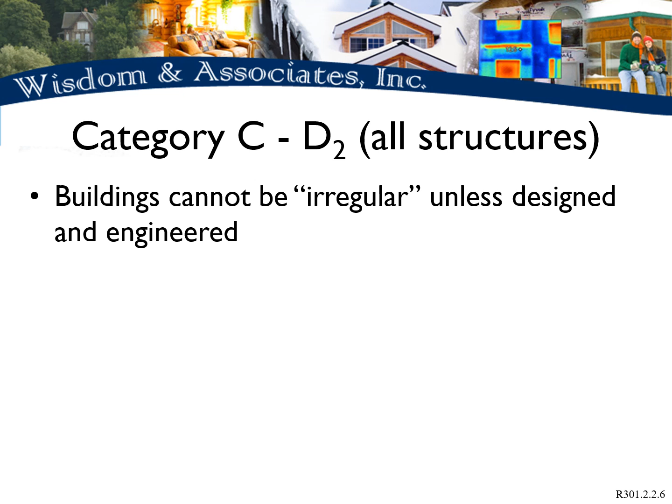A new condition has been added to the 2021 edition of the code, which now includes hillside light frame construction. This type of construction most commonly refers to daylight basements, but would also apply to crawl spaces on sloped lots. In order to be considered irregular, all of the following factors would apply: 1. The grade slope exceeds 1 in 5 on any side of the building. 2. The tallest cripple wall exceeds 7 feet.

In this instance, a cripple wall would be any wood-framed wall between the lowest floor and the floor above, generally resting on top of the foundation. Cripple walls are common where full-height foundation walls are not used on sloped sides of lots in order to save on materials. And number 3, less than 50% of the interior walls in the structure are finished.

As we can see, these rules are really targeting the unfinished daylight basement, due to the imbalanced load on the foundation and the lack of shear strength from the unfinished walls. There is an exception to this rule, which does permit the downhill or daylight side to be fully stick-framed if all other walls are full-height foundation wall from the slab to the floor above.

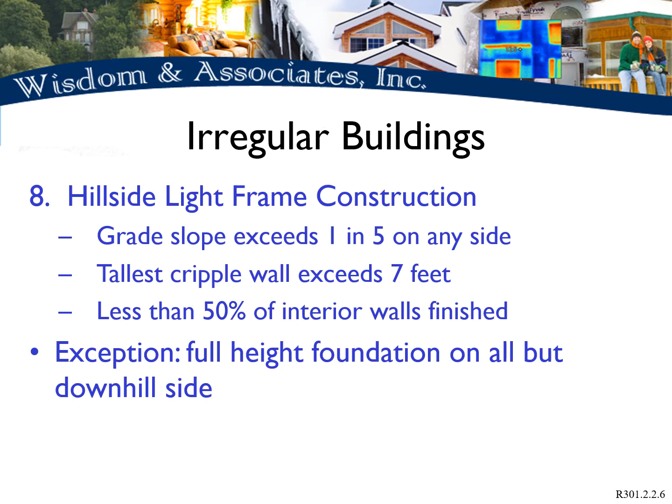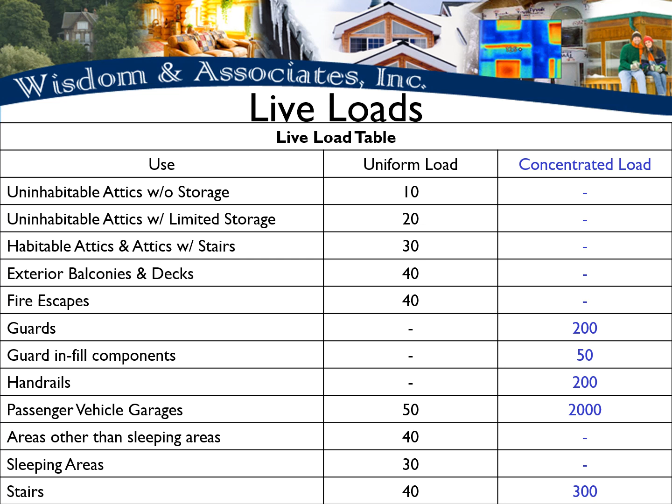A change to the live load table has occurred in the 2021 version of the code, where live load was changed to uniform live load, and a category for concentrated load was added. Interestingly, some of the concentrated load in the updated table comes from the notes in the 2018 version, but these notes, plus some new additions, have been added to the concentrated load category.

There are a few interesting notes on this table to cover. One is that for passenger vehicle garages, the concentrated load applies to garages with elevated floors. A garage floor can be framed up off of grade level, but it would need a non-combustible surface, as we will see later.

The 2,000-pound figure applies to a 4.5 by 4.5 square inch area, such as would be under a vehicle tire. This figure was in the notes in the previous code edition table, but it only specified the load be applied to a 20 square inch area.

Stairways got a new similar requirement in the 2021 code with a concentrated load rating of 300 pounds on a 2-inch by 2-inch surface area, rather than 4 square inches as noted in the previous code. There must have been some pretty creative ways these loads were being tested in order for this code to change.

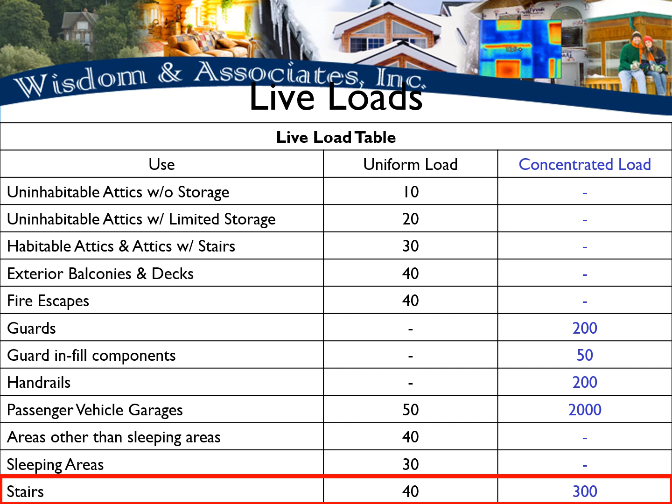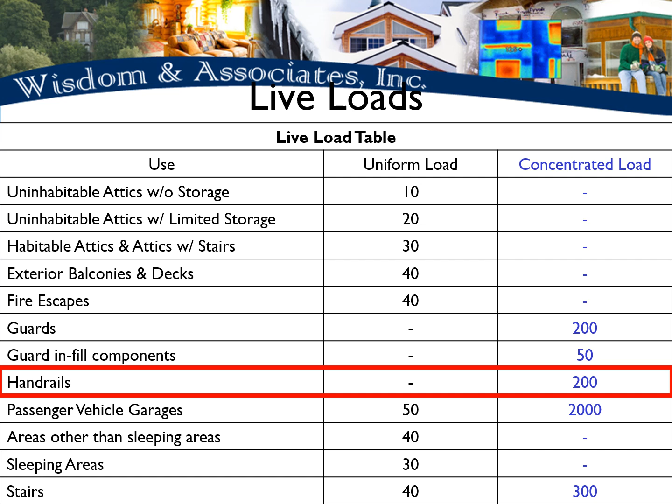Handrails also got a concentrated load rating, although this rating already existed in the notes of the table in the 2018 version of the code. Handrails must withstand 200 pounds of force applied anywhere along, and in any direction on, the top.

For dwellings with attached private garages, the garage cannot open directly into a room used for sleeping purposes. Although bedrooms are not strictly defined in the code, sleeping rooms must have an emergency egress window meeting all requirements of this code, as well as a smoke alarm. So rooms that meet these requirements cannot open directly into a private garage.

Doors that separate the interior of a residence from an attached garage must meet special requirements for fire separation and protection. The door must either be a minimum 1 3/8 inch thick solid core wood or honeycomb steel door, or have a minimum 20-minute fire rating approval.

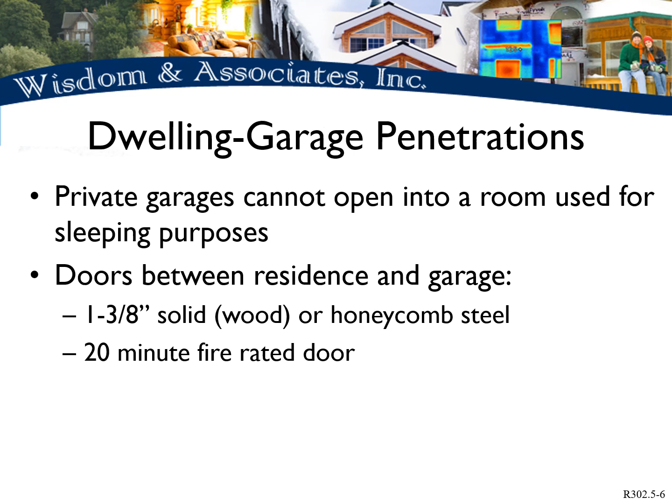Windows are not permitted in these doors unless they are a tested assembly and UL listed. A self-latching and automatic closing device is required on the door between the garage and the home.

This is a significant change in language from the previous code, which did not make any reference to the door being set to latch.

For a garage man door to effectively block smoke, fire, and carbon monoxide from entering the living space, latching is crucial—just as important as the door's ability to self-close. Without a reliable latching mechanism, even a closed door becomes susceptible to air pressure caused by a fire, potentially forcing it open. Notably, the code does not spell out how the self-latching is tested, such as how far the door must be opened to accomplish it.

Moving on from fire protection, let's take a look at minimum habitability requirements. Each habitable room in a dwelling must have at least 8% of the floor area in windows, and 4% of the floor area must be operable window.

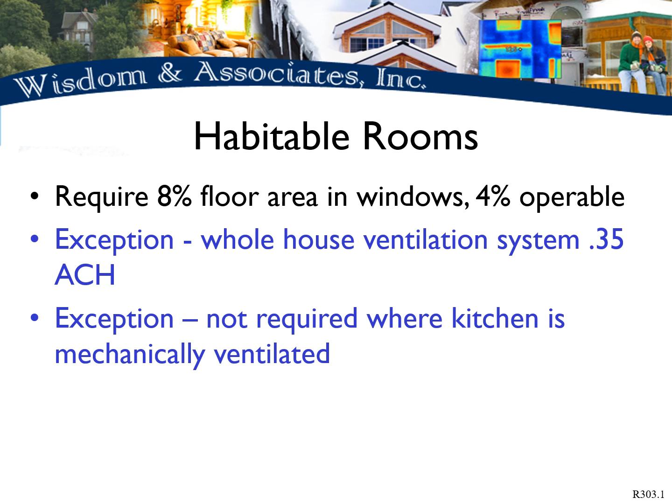Operable windows that meet egress requirements are still needed in bedrooms and sleeping rooms. Operable windows can be omitted from kitchens where local exhaust is provided at a rate of 100 cubic feet per minute, which is also a requirement of the state-adopted energy and ventilation codes.

Air intake openings, such as for ventilation systems, whether passive or mechanical, must be located at least 10 feet from any contaminant sources, such as chimneys, vents, or parking areas. An air intake can be closer than 10 feet if it is 3 feet below the pollutant source.

This is a slight departure from the state-adopted energy and ventilation code, which does not have the 3-foot exception, so keep that in mind. The exhaust from dwelling unit toilet rooms, bathrooms, and kitchens is not considered hazardous, so there are no separation requirements for these exhausts from air intakes.

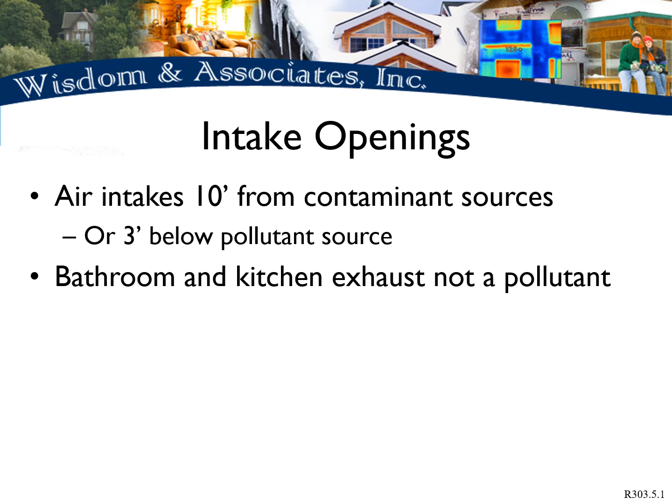Dryer ducts, however, are in their own category and must terminate at least 3 feet from openings into the building, which the code has clarified in 2021 to include soffit vents. The amount of moisture produced by clothes dryers can be very damaging to the building, especially in the attic space, so dryer exhaust must be kept well away.

The exhaust from clothes dryers is typically much warmer than the surrounding air and as such wants to rise into openings in the building above, such as soffit vents. The warm, moist air in the exhaust will condense on the cooler building components, especially during the winter, which can lead to a buildup of frost and moisture that will damage the home over the long term.

A new ceiling height exception has been added to the 2021 code for non-basement areas. Beams and girders, which are spaced at least 36 inches on center clear finished width, meaning 36 inches between the edges of each beam or girder, can project down to 6 feet 6 inches.

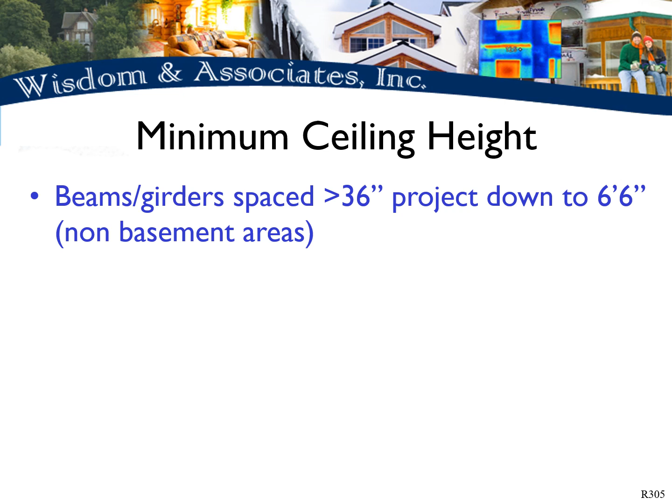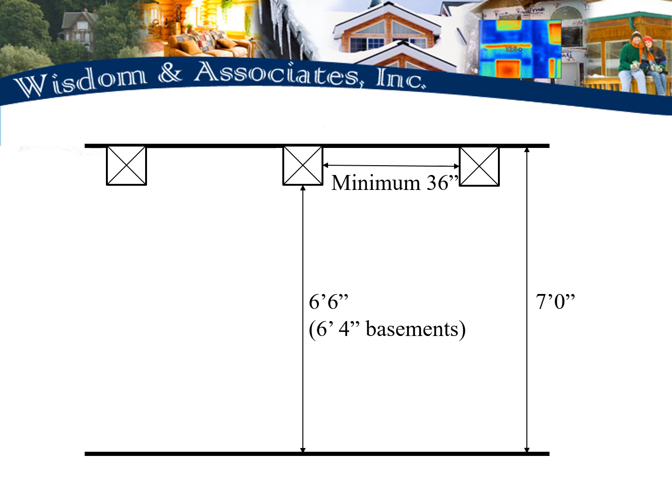A slight change to the safety glass codes has happened in the wet surfaces section. Safety glass is required at windows or glazings enclosing wet areas such as tubs, showers, hot tubs, saunas, and similar fixtures and equipment. If the enclosing window is less than 60 inches vertically from the standing or walking surface, then tempered or safety glass is required.

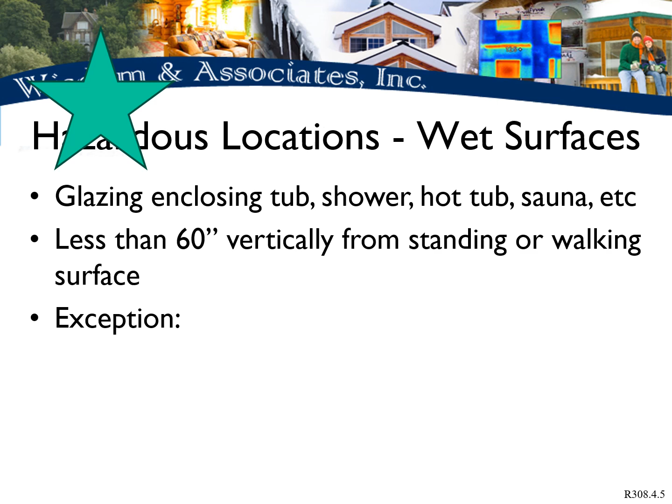The only exception is if the window or glazing is more than 60 inches from the water edge of the bathtub, hot tub, whirlpool, or similar fixture.

A slight change occurred here in the 2021 code, which removed the phrase "and in a straight line" from this section of the code. According to the commentary, this change is intended to clarify the 60-inch measurement from the water's edge to include windows adjacent to the water on any wall, not just those walls facing the wet area.

The code assumes a person is just as likely to slip and fall to the side as to fall forward into the glass, and therefore the wet area around the tub or other fixture is treated just like the bottom of a stairway.

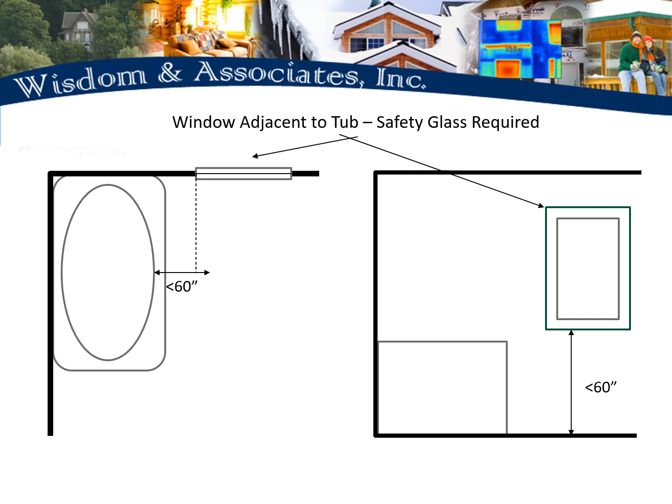This illustration shows the safety glass next to a tub or shower rule applies even to windows not on the same plane or facing the fixture. Any glazing within a 60-inch arc of the water's edge is included in the safety glass requirements if it is less than 60 inches above the standing or walking surface.

Emergency escape must open into a public way, or a court or yard that opens to a public way that is 36 inches in width. The 36 inches in width is a new addition and clarification to the code, which did not previously specify a width. This change brings the IRC in line with the IBC, which does specify a minimum width for egress courts from Group R3 occupancies of not less than 36 inches.

There is also an exception for emergency escape from basements, provided that the basement is less than 200 square feet and houses only mechanical equipment.

For proper emergency escape and rescue, the egress, whether it is a door or a window, must be operable from inside the room in which egress is required. The means of egress, again whether a door or a window, must be operable without keys, tools, or special knowledge. This means that deadbolts or similar locks or apparatus cannot be keyed on the inside.

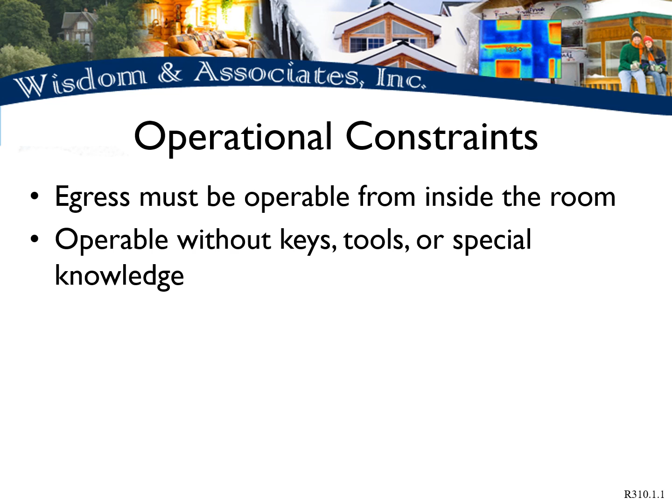If the egress is greater than 6 feet above the adjacent ground level, a fall prevention device meeting ASTM F2090 must be installed. The fall prevention device cannot be more than 70 inches above floor level. This is a new addition to the 2021 code.

This revision makes the operational and opening control device provisions in the IRC consistent with the same provisions in the IBC.

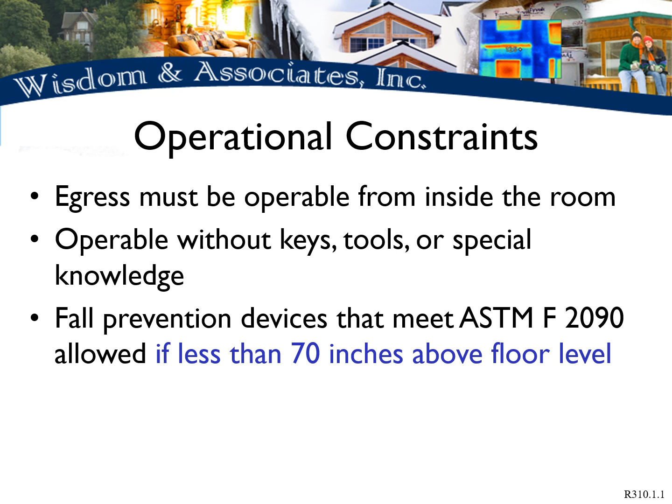A new addition to the code clarifies that the net clear opening by which the egress dimension is measured has to be from the normal operation of the window. The removal of stops installed in the frame, such as for hung windows that slide vertically, cannot be counted toward the net clear opening, since that would not be part of the normal operation.

Another significant wording change in the 2021 code is that the height of the egress opening is measured from the floor to the bottom of the clear opening of the window, not the window sill. This is a change that has gone back and forth several times in previous code cycles. Measuring to the bottom of the clear opening may take more planning on the builder's part, as the thickness of the window frame now plays an important part in the measurement of the egress opening height.

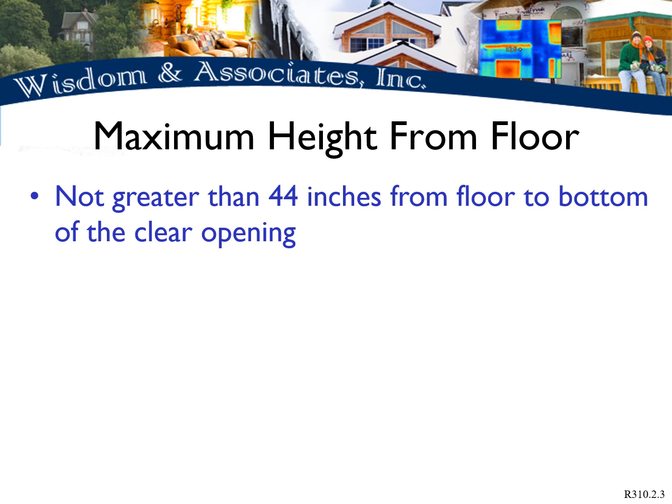Instead of a ladder, a window area well is permitted to have steps leading out of the well if the depth of the well is greater than 44 inches from the bottom to grade level. This was the case in the 2018 code as well, but some new requirements were added for step dimensions in this version. Previously, the code only said that steps did not have to comply with the rise and run requirements cited elsewhere in the egress section. The minimum width of the inside of the treads is 12 inches, and the minimum tread depth is 5 inches. The maximum riser height is 18 inches.

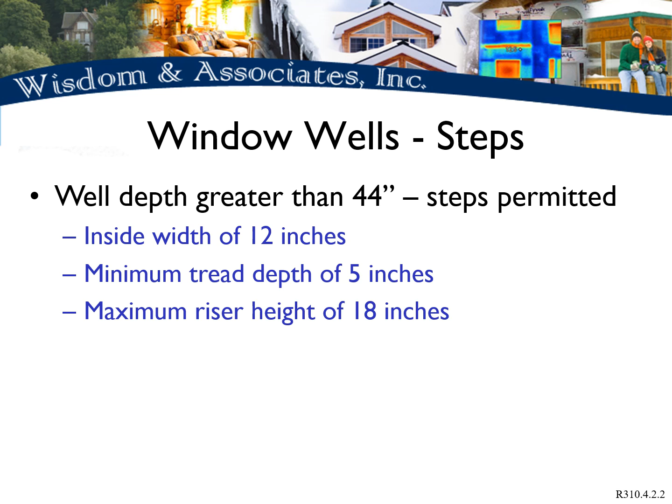Any addition to an existing structure with a sleeping room must have an egress window opening. Also, any new basement must have an egress installed, unless there is a sleeping room in the basement with an egress window, or there is an attached existing basement that already contains an egress, in which case a new egress opening would not be required. Remodeling of an existing basement does not retroactively trigger the installation of an emergency escape opening as is required for new basements.

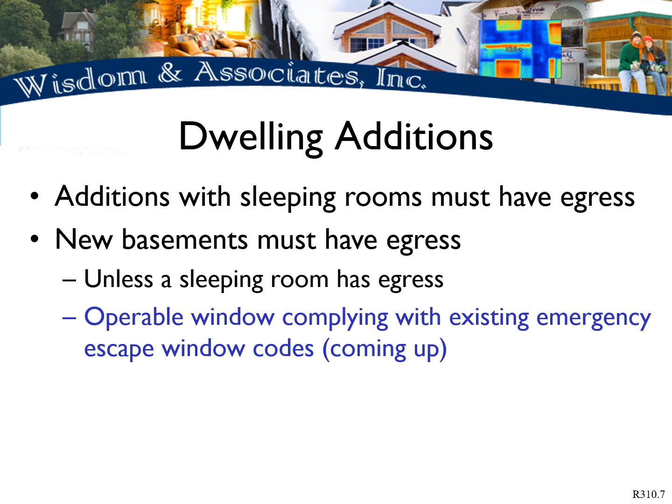A new change to the 2021 code permits an operable window of a smaller size to be used in this situation, provided that it follows certain rules. Where a change in occupancy in a basement takes place, such as when an existing or unfinished basement is remodeled to include a bedroom, a smaller than standard egress window is permitted. The smaller window is also permitted when a basement addition is installed to pre-existing construction.

The smaller egress window must have a net clear area of 4 square feet, which is substantially smaller than the 5 square feet for grade floor openings and 5.7 square feet for standard egress openings. The minimum opening height of the window must be 22 inches, rather than the 24 inches noted earlier in the egress section. The minimum opening width requirement is 20 inches, which is the same as before.

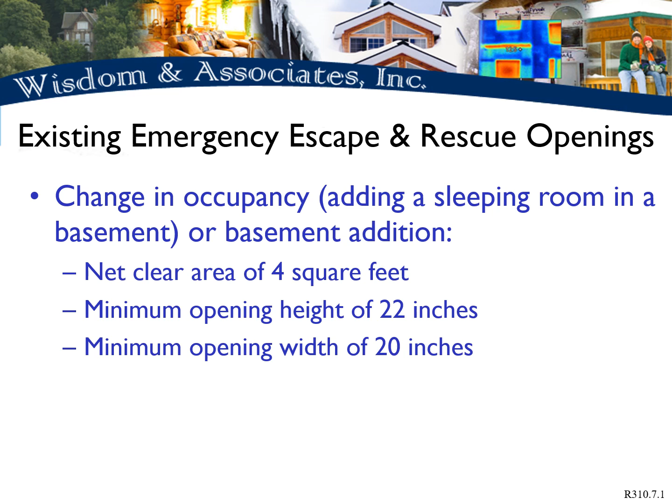An interesting addition and clarification has been added to the 2021 code, a new section describing which stairways are not required to meet code. The first of these new exceptions is for stairways that are not within the home or attached to the home in any way, including decks and porches. This exception refers to landscaping or other exterior stairways that may lead up to the building or transition between levels of the home outside of the building.

The second new exception is for stairways leading to non-habitable attic spaces, such as drop-down folding type stairs, which are often used to access attics that are floored for storage but do not contain habitable space. The third new exception is for crawl spaces, which are now explicitly permitted to be accessed by a ladder or other means. This is a common sense addition to the code that most were already following anyway, but now it has been made clear.

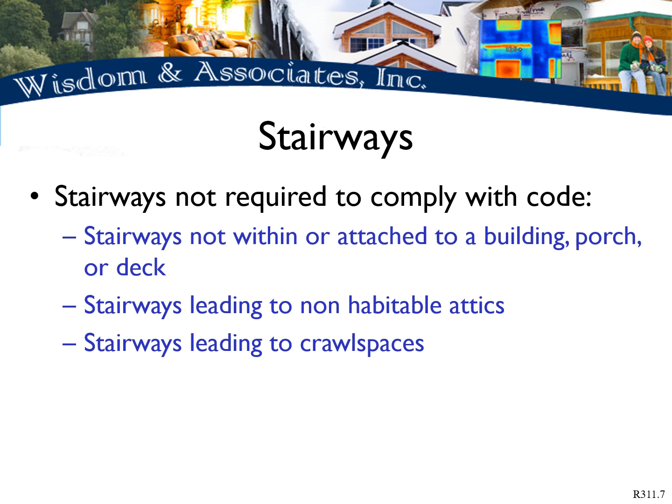The walking surfaces of stair treads and landing surfaces cannot exceed 1 in 48, or 2% slope, in any direction. A new addition to the code allows steeper slopes, up to 5% or 1 in 20, for exterior landings that also drain water away from the building. Impervious surfaces around the perimeter of the building must be sloped away, and this code permits a greater slope to allow that to happen.

This new exception addresses the potential conflict between the minimum drainage slope and the maximum slope allowed for an exterior landing. To comply with surface water drainage codes, an exterior landing can now slope up to the minimum 5% required for finished grade around the structure.

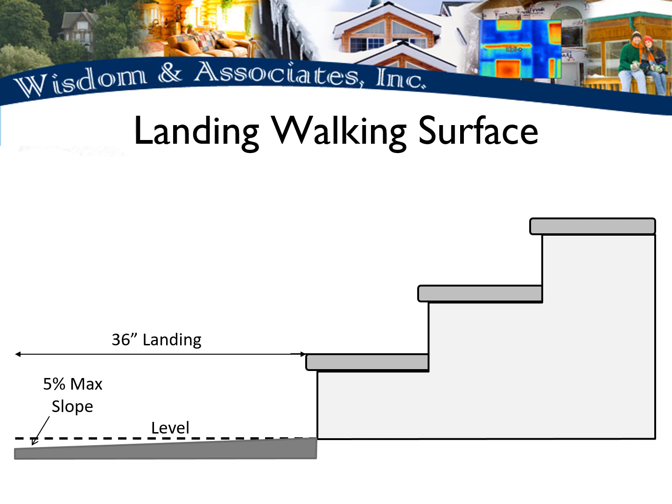Handrails must be continuous from a point over the lowest riser to over the top riser. This means you must be able to place your hand at one end of the railing and not have to lift or remove your hand until reaching the other end.

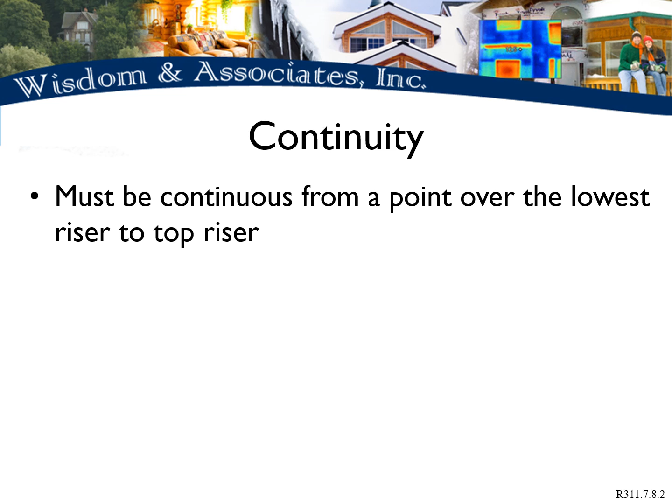Handrails must either return to the wall or properly terminate into a guard or post. The language of safety terminals cited in previous editions of the code has been removed since it was not clearly defined what a safety terminal was. We suggest checking with your local building department to get their interpretation of what is acceptable for a hand railing termination in your jurisdiction. Hand railings must have a minimum 1.5-inch clearance between the railing and the wall to allow for proper grip.

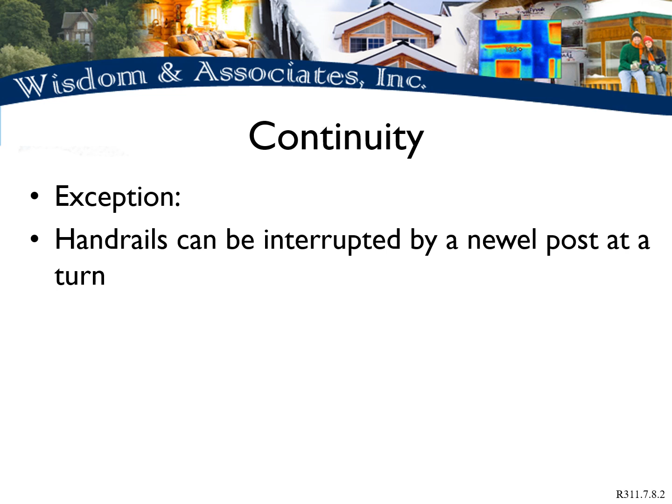There are two exceptions to the continuous handrail requirement. The first is that handrails can be interrupted by a newel post at the turn in the stairs. The second exception is that a volute, turnout, or starting easing is allowed over the lowest tread. An addition to the code now permits a volute, turnout, or starting easing at the top landing as well as the lowest tread.

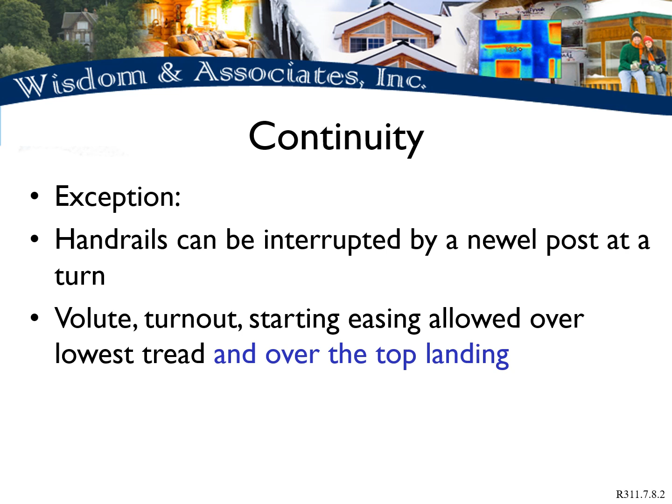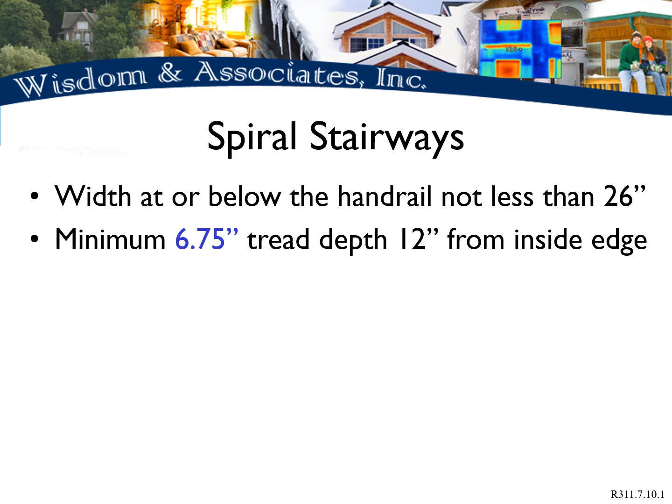Spiral stairways have a different set of requirements than regular or winder stairways. The width of a spiral stairway must not be less than 26 inches at or below the hand railing. The minimum tread depth for a spiral stairway is 6 3/4 inches at a point 12 inches from the inside of the tread. This is a reduction from the previous edition of the code, which required a minimum 7.5 inches along the 12-inch walk line. Spiral stairs are allowed up to a maximum of 9.5 inches of rise, and the minimum headroom for a spiral stair is 6 feet 6 inches.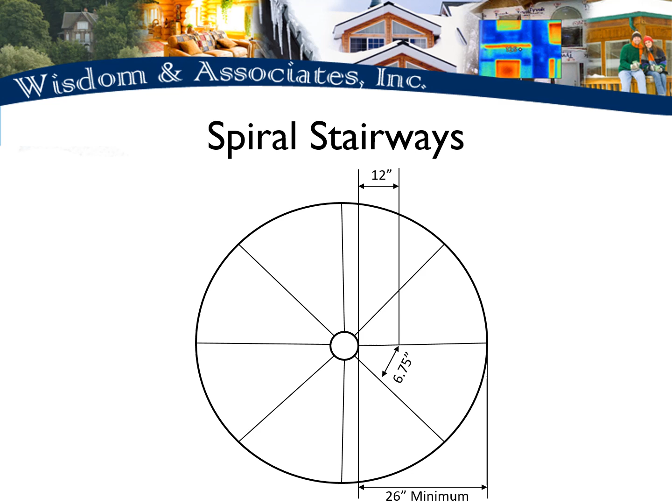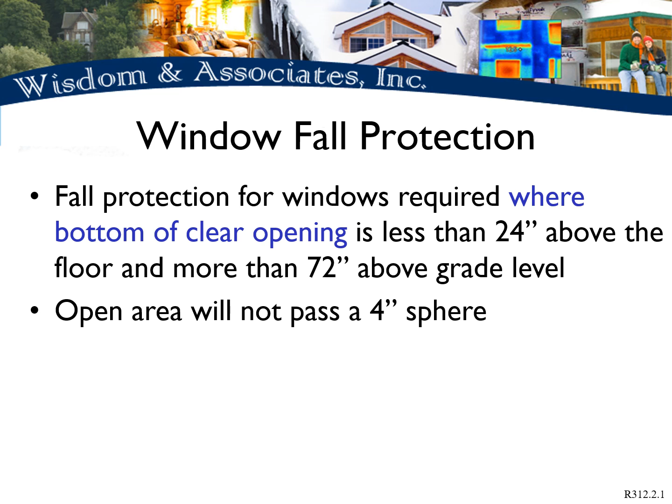Window fall protection is required for windows where the bottom of the window clear opening is less than 24 inches from the finished floor and more than 72 inches above grade level. There is a wording change here that used to read top of the window sill and now reads bottom of the window clear opening, which is consistent with the change made in the egress window section of the code. The idea is to protect small children from opening and falling out of a window onto the ground. Similar to the guarding requirements noted elsewhere, the opening area must not allow the passage of a 4-inch sphere with the fall protection installed.

Smoke alarms are an important life safety device that can alert the occupants to a fire in the dwelling. Smoke alarms are required in each sleeping area of the dwelling, and also required outside each separate sleeping area in the immediate vicinity of the sleeping area. A smoke alarm is required on each story of the home, regardless of the presence of sleeping areas. Smoke alarms are not required on split-level homes with a floor level difference of less than one story, provided that there is not an intervening door between the levels.

A new addition to the code permits listed smoke alarms that are marked as helping reduce cooking nuisance alarms. These cannot be installed closer than 6 feet to permanently installed cooking appliances. These alarms are a UL listed type that have become recently available.

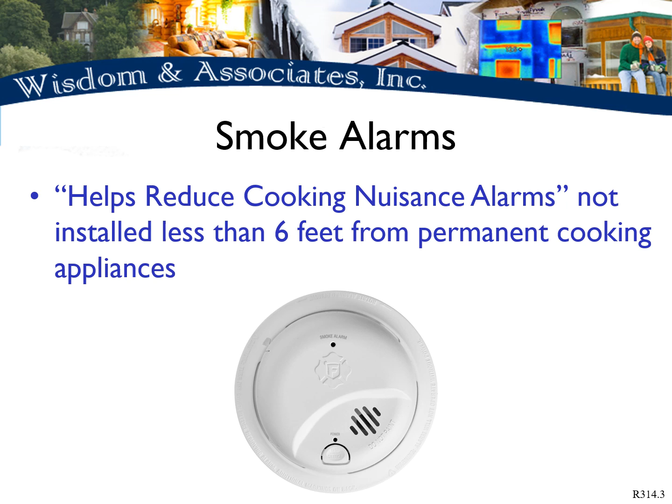Due to the risk of carbon monoxide poisoning fatalities typically happening while people are asleep, the IRC mandates the installation of carbon monoxide alarms near and around bedroom areas. This requirement is in line with that for smoke alarms and applies not just to new homes, but also to existing homes undergoing construction work, making it one of the rare retroactive rules in the code. If construction work necessitates a permit, then the installation of alarms in specified areas becomes mandatory.

Carbon monoxide alarms are required in all dwellings that have either a fuel-fired appliance or an attached garage. They must be installed outside of each separate sleeping area of the home in the immediate vicinity of the bedrooms. Carbon monoxide alarms must also be installed in every bedroom or sleeping room where a fuel-fired appliance is located in the bedroom or in an adjoining bathroom. This could include a water heater, space heater, or a gas or wood-fired fireplace or stove. Where more than one carbon monoxide alarm is present, it must be interconnected with any other carbon monoxide alarms installed.

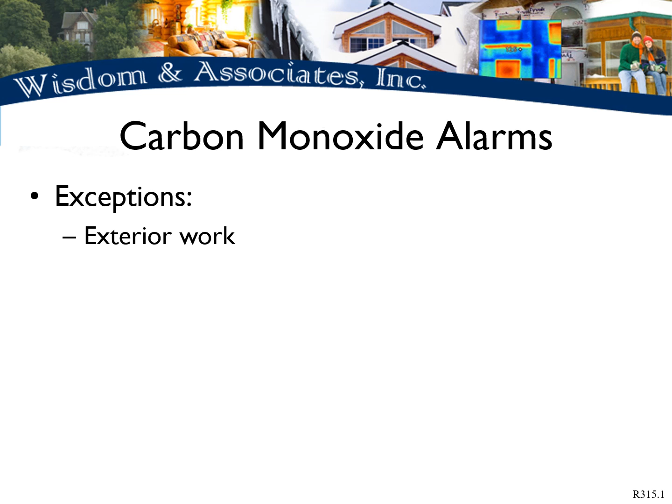There are a few exceptions to the carbon monoxide alarm requirements for retrofit or repair work on homes. The first exception is for when the work being done to the home is on the exterior only, such as for the replacement of doors, windows, roofing, or siding.

The second exception is for the alteration, installation, or repair of existing plumbing work in the home. This type of work would not trigger the requirements of installing carbon monoxide alarms.

The third exception is for the alteration, installation, or repair of mechanical systems that are not fuel-fired. This is a change in the wording of the code from the previous edition that exempted all mechanical work. Now, however, if work is to be done with a fuel-fired appliance of any type, carbon monoxide detectors must be installed.

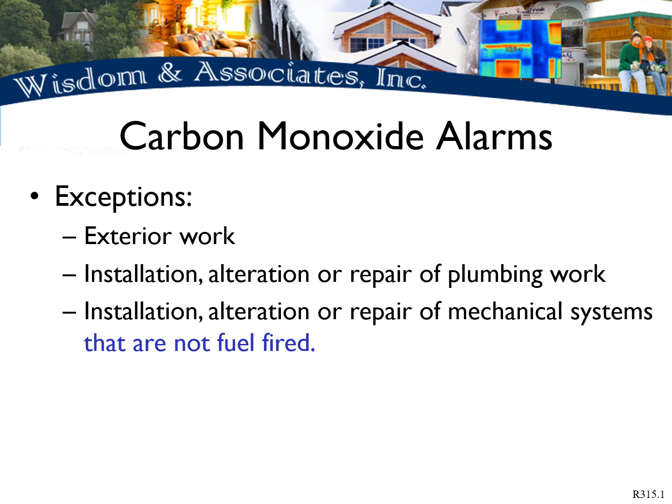Foam plastic insulation is a lightweight synthetic material used as an insulation to enhance the energy efficiency of buildings. It comes in various forms, including spray foam, rigid foam boards, and flexible foam sheets, catering to different applications from walls to roofs and floors.

This type of insulation has good thermal resistance and high R value per inch in many cases, but may also be considered a potential fire hazard when installed inside the building.

Foam plastic products located in the attic do not have to be covered by gypsum board or 23/32 inch wood structural panel as long as the space is accessible and the space is entered for maintenance or repair only.

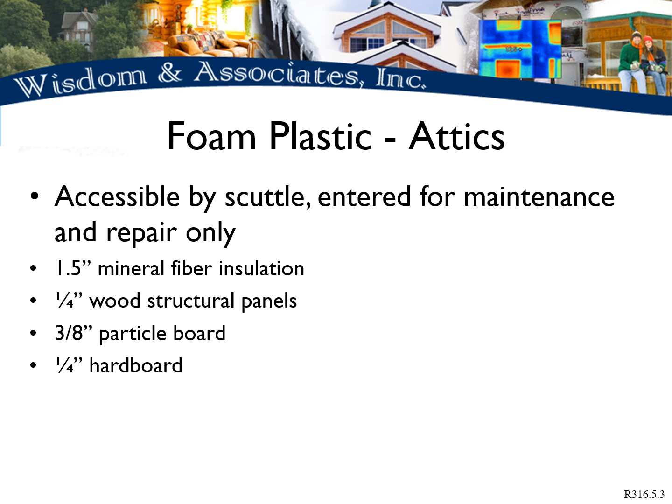And it is covered by one of the following materials, which include 1.5-inch thick mineral fiber insulation, 1/4-inch thick wood structural panels, 3/8-inch thick particle board, 1/4-inch thick hardboard, 3/8-inch thick gypsum board, 0.016-inch thick corrosion-resistant steel, which would be minimum 27 gauge, 1.5-inch thick cellulose, or 1/4-inch thick fiber cement board, which is a new addition to the code.

Essentially, by having the space entered for repair or maintenance only, a lesser covering is permitted.

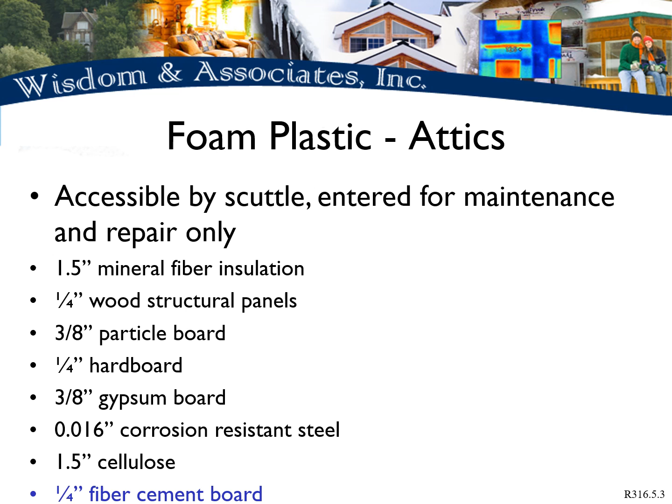The decay-resistant section of the 2021 code has had several changes occur this code cycle. Decay-resistant or pressure-treated wood is required for wood joists or structural floors closer than 18 inches to exposed earth, and wood girders closer than 12 inches to exposed earth.

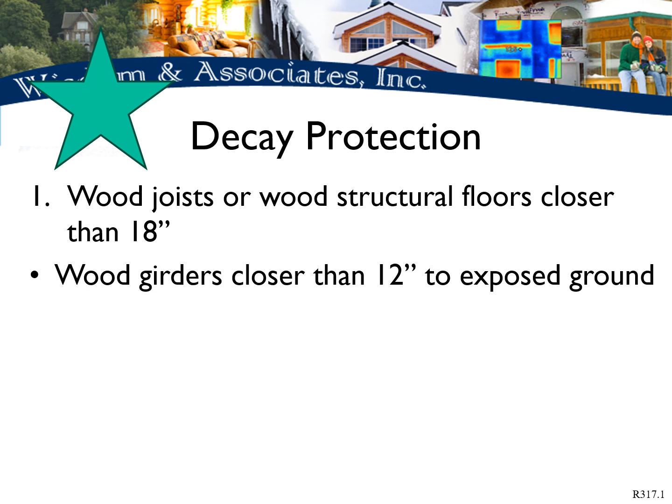Exposed earth or ground is not recommended and not permitted by Alaska's energy code inside the building, but this code applies outside the building as well. Wood that is this close to the ground may be subject to decay from moisture or water coming up from the ground. A new addition to the code now includes wood columns in this section.

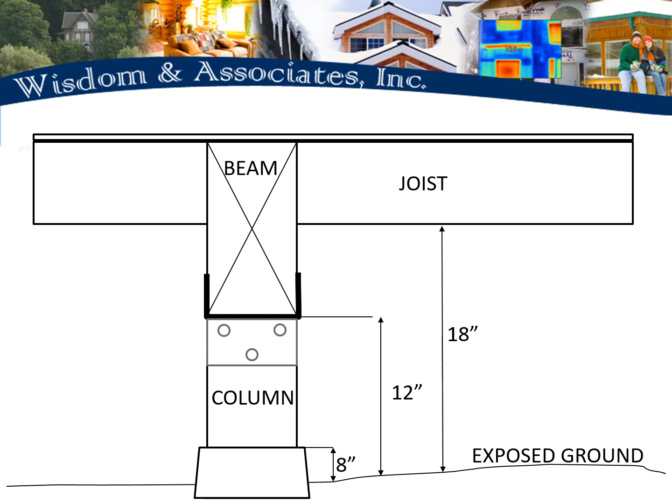Wood columns cannot be closer than 8 inches to exposed ground or decay protection is required. This graphic illustrates the various distance requirements for framing members exposed to earth. Where the distances are less than shown, decay-resistant or pressure-treated materials are required.

The second location pressure-treated wood is required is for wood framing members that rest on concrete or masonry exterior foundation walls that are less than 8 inches above exposed ground. This part of the code has been changed to include columns as well.

Another interesting clarification for this edition of the code is the word directly. This code applies to wood that is resting directly on masonry or concrete and would not apply where separated by a moisture barrier.

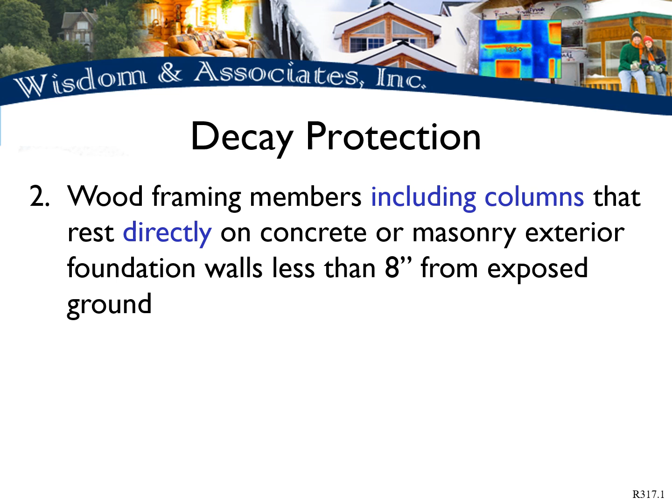Wood framing members such as sill plates must be at least 8 inches above grade level at exterior foundation walls, or decay-resistant or pressure-treated material is required.

There are two new additions to the decay protection section of the code. The first addition requires that portions of wood structural members that form the structural supports of buildings, balconies, porches, or similar permanent building appurtenances, where those members are exposed to weather without adequate protection from a roof, eave, or overhang, or other covering that would prevent moisture or water accumulation on the surface or at the joints between members.

This addition is really targeting uncovered decks with decking boards that permit water to pass through, which could accumulate on the support beams and posts and cause rot or water damage.

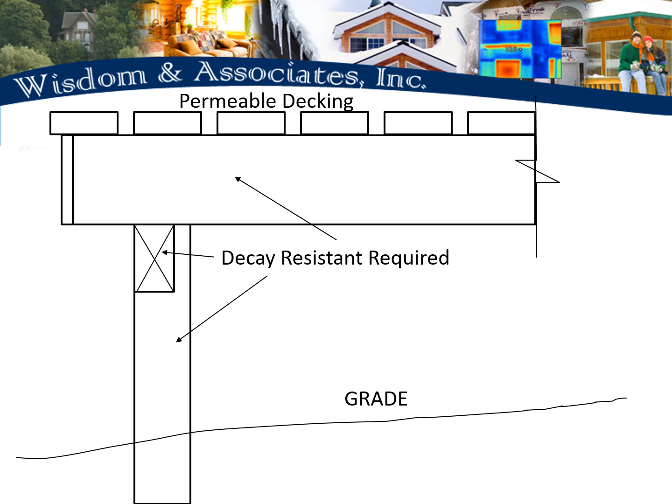This illustration shows the requirements for decay-resistant structural members, such as the joists, posts, and beams for decks that have permeable surfaces that are not covered with a roof or other component to prevent water accumulation below.

There is an exception to this new addition to the code, which allows non-decay resistant lumber to be used as long as it is sawn lumber, meaning it has a full 2 by nominal dimension and is not an engineered product, such as an I-joist or other compressed wood product, and it is located in a geographical area where experience has demonstrated that decay-resistant materials are not needed. This exception refers to areas of the country, such as the Southwest, where there is very little precipitation. You would be hard-pressed to find a suitable location for this exception in Alaska.

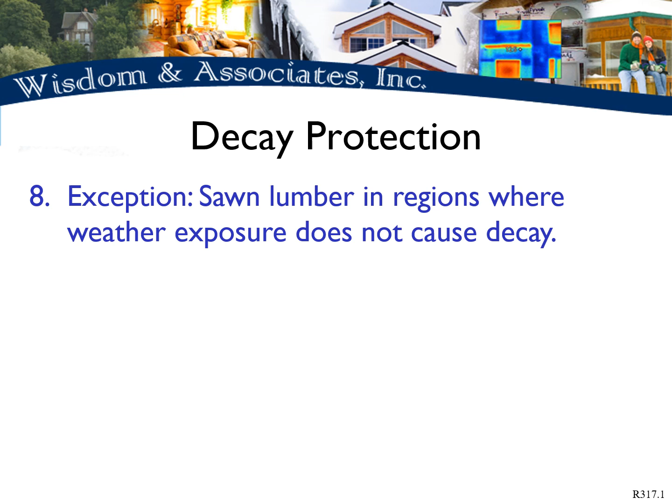The second addition to the code requires that wood columns in contact with basement floors be decay resistant unless they meet the following two requirements. One, they have to be separated above the concrete basement floor by a concrete pier or metal pedestal by at least 1 inch. And two, they have to be separated by an impervious moisture barrier where a concrete pier is used.

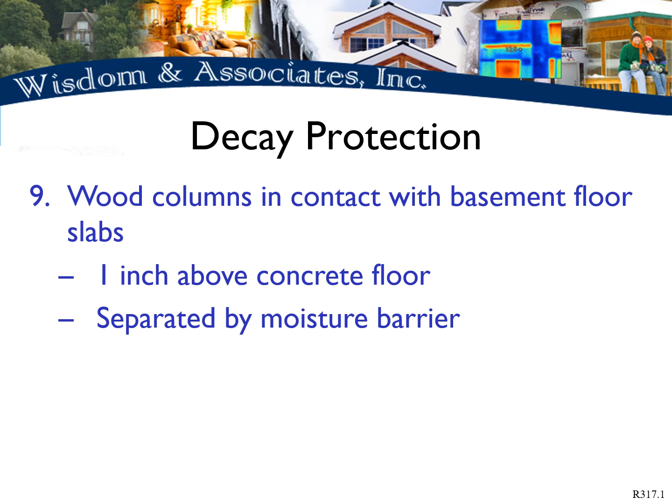Habitable attics are a new addition to the 2021 code. Habitable attics are a way to add an additional living space to a building at the top without having to consider it an extra story. This is helpful where an additional level to the home is desired without exceeding the 3 stories above grade plane limitation in the code, or 2 stories above grade plane in seismic design category D for single-family dwellings.

The minimum room areas and ceiling height rules for regular stories of the home apply for attics to be considered habitable. The habitable attic may or may not be considered an additional story above grade plane that would count against the maximum 2 or 3 stories permitted. We will cover those rules next.

A means of egress is required in the habitable attic that complies with the egress section of the code, which we covered already.

When is a habitable attic not considered an additional story? It has to meet all of the following requirements. The first requirement is that the square footage of the habitable attic cannot exceed 1/3 of the floor area below. However, up to 2/3 of the floor area below is permitted if there is a code-compliant sprinkler system installed.

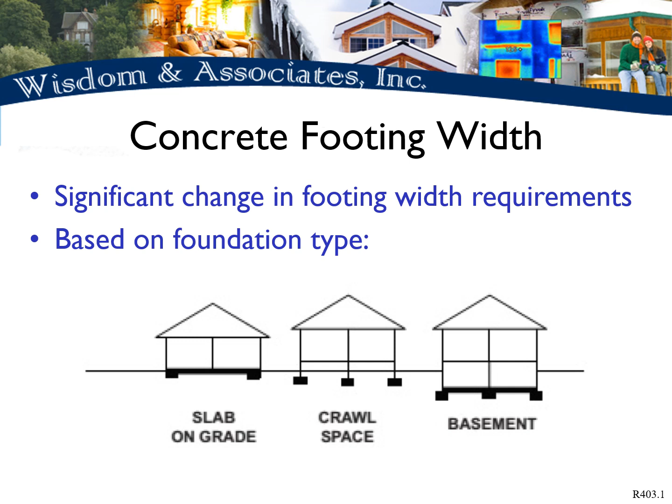The required concrete footing width is based on one of 3 foundation types: slab on grade, crawl space, and basement. The footing widths increase moving from slab on grade to crawl space, and from crawl space to basement, to account for the additional weight of the foundation wall that is added to the structure.

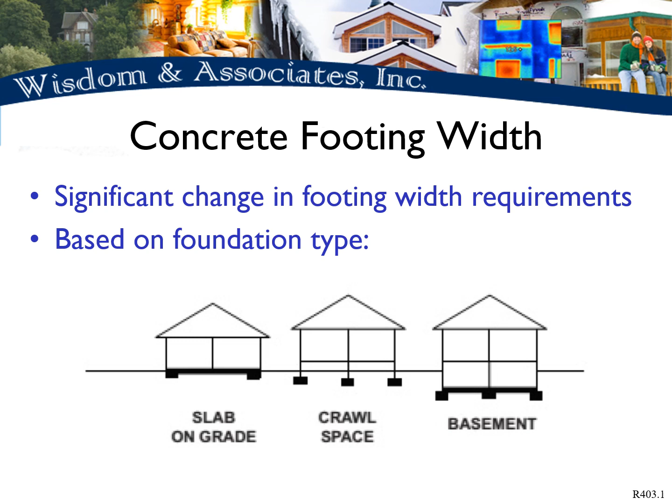The required footing widths are based on several factors. The first factor is the soil bearing capacity. The greater the soil bearing capacity, the smaller the footing is permitted to be, and vice versa.

The type of construction also has an impact on the footing size. Light frame construction will permit smaller footing sizes than brick veneer. Concrete or masonry walls require the largest footing sizes as they have the most weight.

The number of stories impacts the footing size as well. The more stories there are, the bigger the footing must be to accommodate the load. The amount of snow load also factors into the footing size. Snow loads of 25, 30, 50, and 70 pounds per square foot are included in the code tables.

The footing tables assume a building width of 32 feet with a center support wall, so essentially a joist span of 16 feet. Building widths that are larger or smaller have a correction factor that applies.

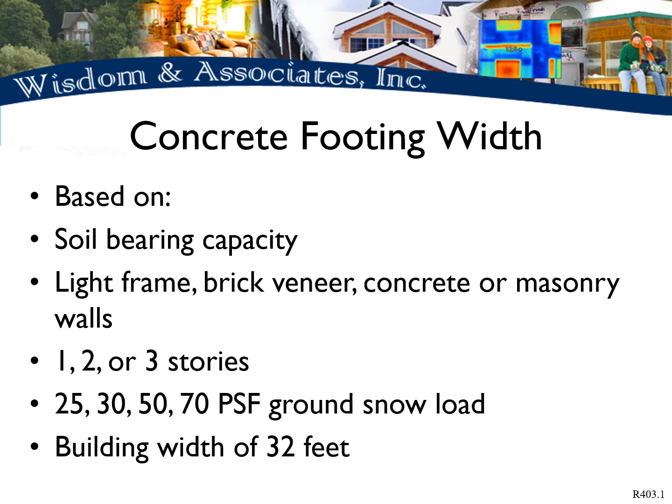A question you might have after looking at these charts is, how are interior footings sized, since most homes have trusses that bear only on the exterior walls? The answer is that the minimum size of any load-bearing footing is 12 inches by 6 inches. This was not explicitly spelled out in the previous code edition, but came from the code commentary.

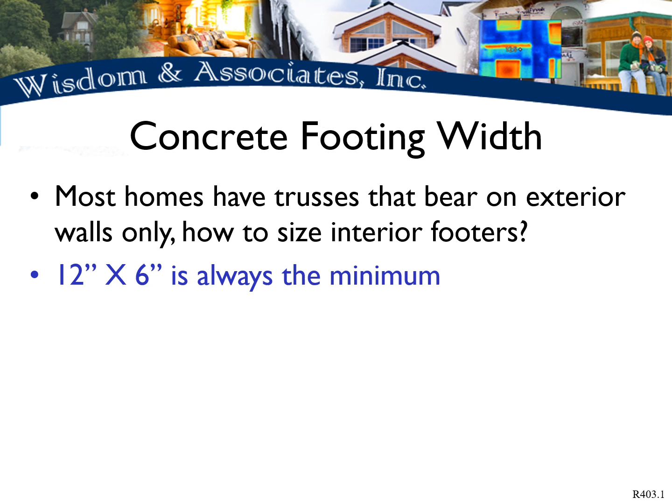It has now been included in the 2021 version of the code. The code outlines specific requirements for foundation anchorage, which means how the wall sill plates are attached to the foundation.

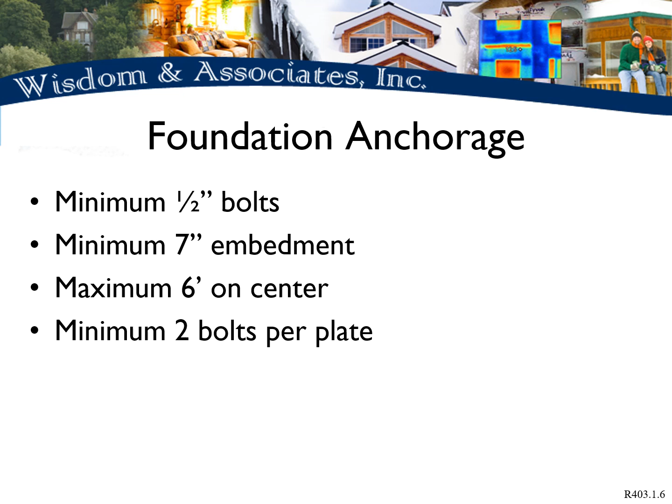At a minimum, 1/2 inch diameter bolts are required. These anchor bolts must be embedded at least 7 inches into the foundation wall. The maximum spacing between anchor bolts cannot exceed 6 feet on center for structures not located in seismic design category D. A minimum of 2 bolts is required for each sill plate section, except for very short sill plates, which we will cover next.

The anchor bolts must be placed a certain distance from the end of each plate. Bolts can be no closer than 7 bolt diameters from the end of the plate. This equates to 3.5 inches from the end for 1/2 inch diameter bolts. Bolts also cannot be located more than 12 inches from each plate end.

A new addition to the code now clearly states the anchor bolts can be wet set into the concrete and do not have to be tied in place prior to pouring the concrete. This is a common practice that is now explicitly permitted in the code.

Some clarification has been added to the 2021 edition of the code in regards to placement of the vents. Ventilated crawl spaces must have openings within 3 feet of each external corner of the underfloor space. This is a change in wording that used to read 3 feet of the building corners. Now external corners are specified, likely to increase air movement.

Openings must be screened, which hasn't changed. However, the code now specifically states that operational louvers are permitted, meaning foundation vents can be openable and closable by the occupants. Many foundation vents already had this function, and installing them was common practice, but now it is specifically allowed in the code.

Another interesting clarification allows the openings to not have to be within 3 feet of exterior corners as long as the openings are placed to provide cross ventilation, but only if a Class 1 vapor retarder is present on the underfloor space floor.

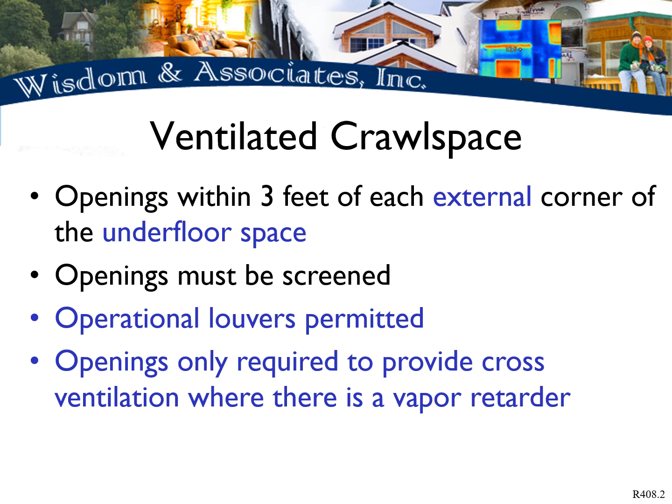The crawlspace ventilation section of the code has changed slightly in the 2021 edition. The fourth method permitted for unvented crawl spaces is to use a dehumidifier in the space, sized per the manufacturer's specifications. This is a change from the 2018 edition, which used to specify a capacity of 70 pints of moisture removal per 1,000 square feet of crawl space floor area.

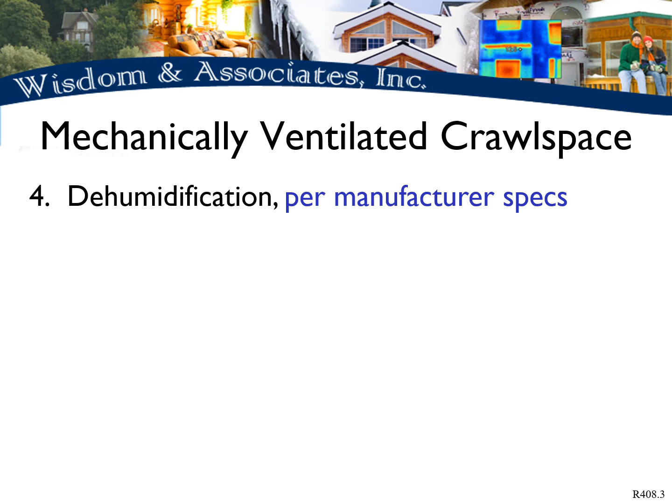Next, let's cover changes to Chapter 5, Floors, in the codebook.

Deck footing sizes are governed by an updated table in the codebook, which is very similar to the 2018 edition, with some minor changes. Footings for decks must extend below the frost line for your local jurisdiction. In Alaska, this can vary from 32 inches to over 50 inches, depending on your location, so check with your building department for the local rules. In any case, the deck footing must extend at least 12 inches below undisturbed ground. This new addition to the code improves the lateral stability and bearing characteristics of the footing for better support of the deck structure.

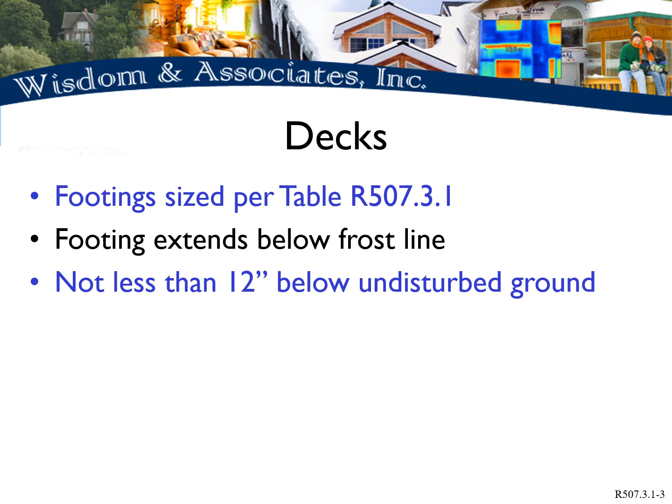The deck post height requirement table has undergone a significant change in this edition of the code and has been expanded greatly to be more specific for different situations.

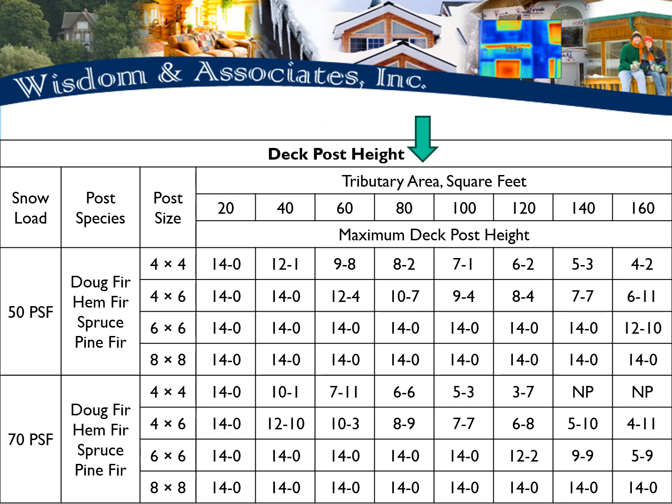Based on the tributary area supported by the post, a maximum deck height is given. You'll notice looking at the table that 14 feet is the maximum permitted height when using this table, no matter what. Heights above 14 feet have to be referred to a design professional. Where the table says NP, it means that the post size selected, in this case a 4x4 post, is not permitted at any height and a larger post will be required.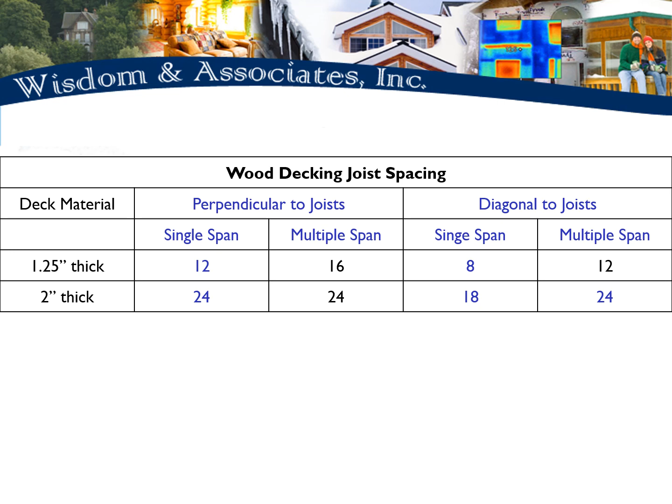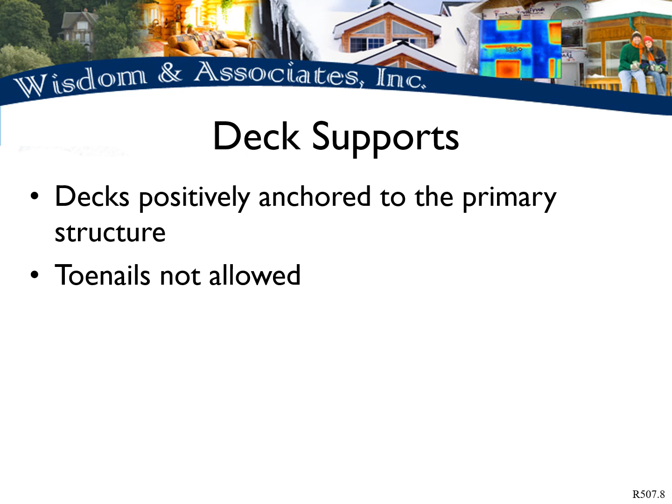Decks must be positively anchored to the primary structure of the home to prevent withdrawal, collapse, or displacement. The decks must be anchored to resist both vertical and lateral loads. Toe nailing is not permitted to hold the deck to the structure, as toenails are subject to pull-out. A minimum 2x8 pressure-treated ledger is required to attach a deck to the side of the home. Pressure treating is required here to resist water damage and decay. Deck ledgers should not support girders or beams and cannot be supported on masonry veneer.

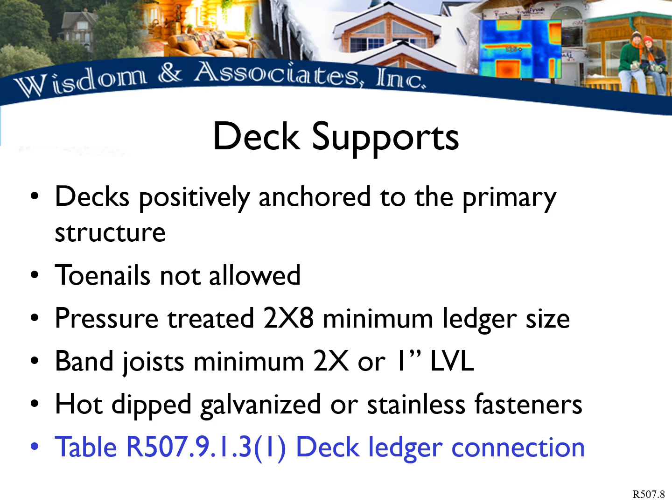Band joists or rim joist must be 2x material or 1-inch engineered rim board to support the attachment of the deck ledger. I-joists are not permitted to be used for the rim board where a deck is attached to the home. Fasteners used in deck ledger connection must be hot dipped galvanized or stainless steel to resist corrosion. The ledger to rim joist connection table has been updated in this edition of the code, which we will look at next.

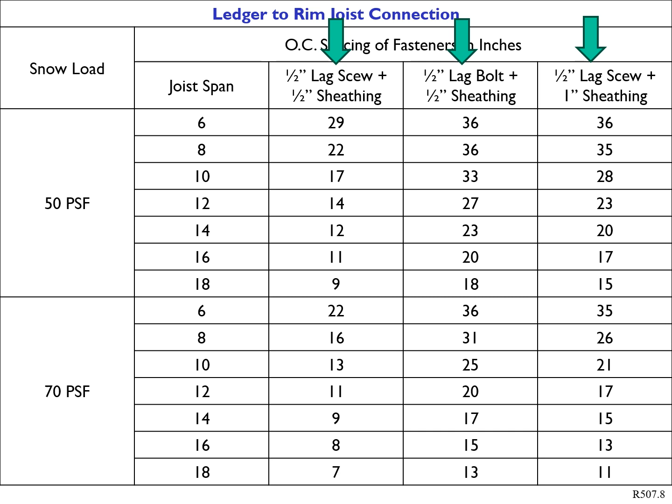This is a simplified ledger-to-rim joist connection table, which specifies the proper spacing of lag screws or lag bolts. The spacing of lag bolts or lag screws is based on the snow load. This simplified chart has 50 and 70-pound snow loads, which are most common in Alaska. The deck joist span is given in this column. As the joist span increases, the spacing of the fasteners decreases to account for the additional load on the deck. Depending on the type of fasteners used and the sheathing thickness of the wall, the on-center spacing of the fasteners is specified.

Exterior deck guarding has been added to the deck's portion of Chapter 5 to address the issue of deck guards that can't withstand the concentrated loads specified in Chapter 3. The 2018 IRC lacked mandates in this section for the installation of exterior guards on decks. These guards act as a crucial barrier to prevent severe and occasionally fatal falls. The design and construction of exterior deck guards, especially the attachment of the guard system to the deck structure, seldom undergo engineering analysis or testing to confirm their effectiveness.

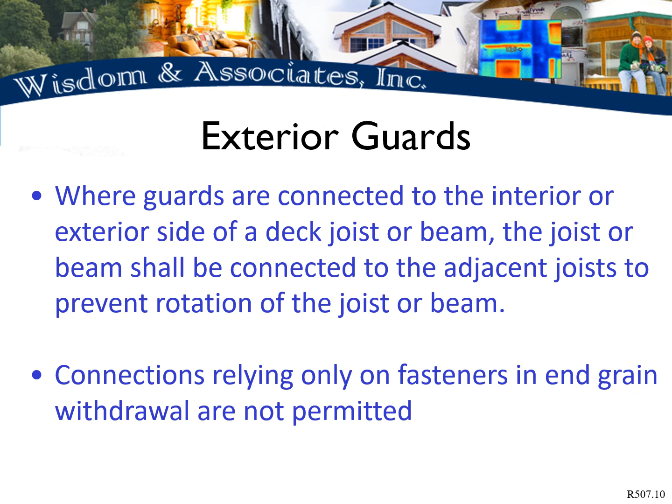Deck guard connections that are fastened through the end grain of joists or beams are no longer adequate, and additional reinforcement is required by the code. Guard posts which are mounted to the top of the deck must connect to the deck framing or blocking. The connection to the deck board is no longer adequate. 4x4 wood posts, which are commonly used as guards, can no longer be notched at the connection to the deck.

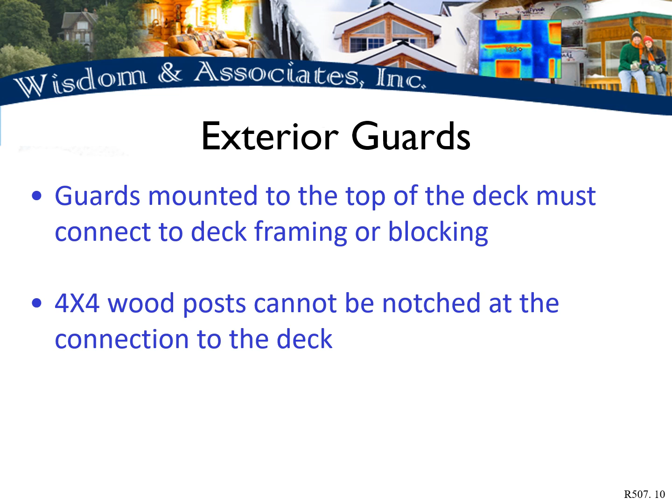Next up is Chapter 6, Walls.

Table R602.3(1), which provides the fastening schedule and attachment requirements, has had a few changes in this edition of the code, which we will highlight. The first significant change to the fastening table is right at the top with Item 1. Previously, Item 1 only covered blocking between joists or rafters to the top plate, but now has been expanded to include trusses, blocking between rafters or trusses not at the wall top plates to rafter or truss, and flat blocking to truss and web filler, all with specific nailing requirements.

The next significant change was the addition of a nailing schedule for full height header studs into the end of the header. The previous fastening table specified nailing a continuous header to a stud only.

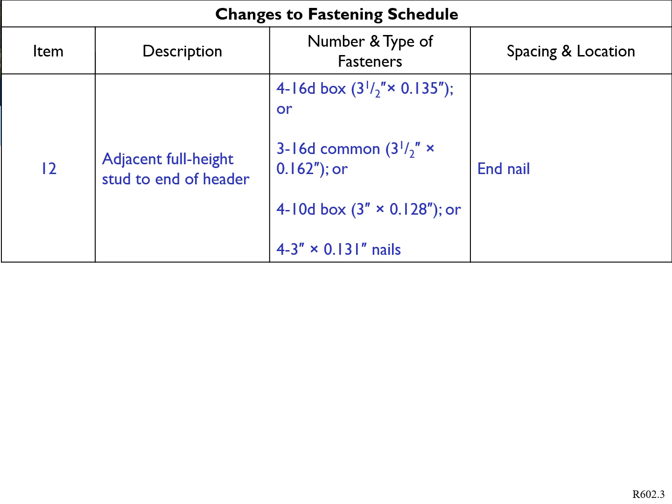The next item that changed in the table added the words rafter or truss to the bridging or blocking nailing requirements for joists.

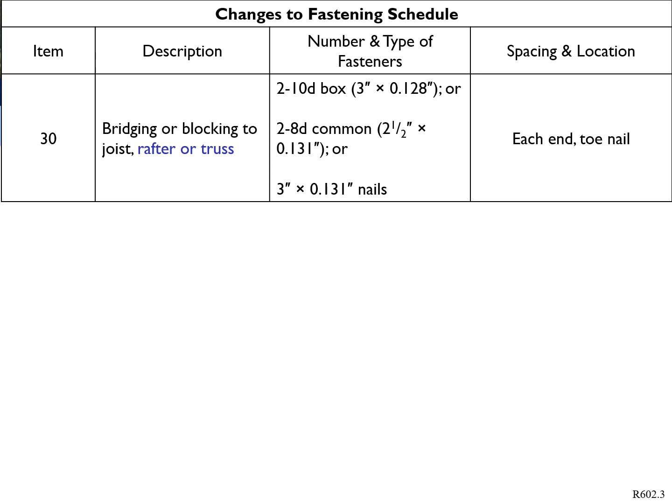Some changes were also made to wood structural panel, subfloor, and interior wall sheathing to framing nailing spacings and sheathing thickness divisions. The field spacing for 3/8 to 1/2 inch thick sheathing has been decreased from 12 inches to 6 inches. Roof nailing for 19/32 and 3/4 sheathing with 8D common nails has decreased to 6 inches on panel edges from 12 inches. Also, a new nail category was added for deformed 2 3/8 inch by 0.113 inch nails for wall and subfloor sheathing. Deformed nails are nails that have ring shanks or screw shanks, which are much more resistant to pull out and therefore able to be spaced further apart.

Next up is Chapter 7, Wall Coverings.

The Wall Coverings chapter governs vapor retarders. A vapor retarder is required on the interior side of the exterior wall assembly in our climate. There is an exception for a design that has been approved by the building inspector. A good example in Alaska of an approved design would be the remote wall system developed by Cold Climate Housing Research Center. This system uses a vapor barrier or vapor retarder on the exterior side of the plywood sheathing and then adds several inches of foam on the exterior side of that.

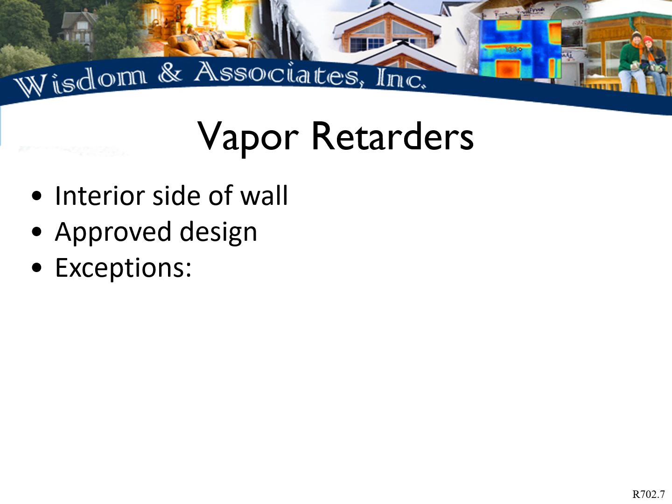The code does permit exceptions for vapor retarders, which would include basement walls, the below grade portion of any wall, and walls that will not be damaged if they freeze, such as concrete or masonry.

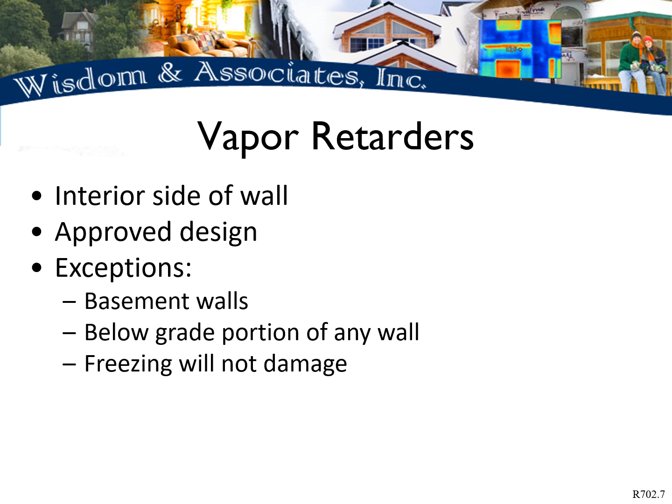The building code has placed Alaska in climate zones 6, 7, and 8, depending on where in the state you are located, and permits a Class 1 or Class 2 vapor retarder to be used. Alaska has adopted an energy and ventilation standard, with amendments, that adds an additional climate zone for the North Slope and dictates more restrictive guidelines on insulation, vapor retarders, and air sealing.

A water-resistive barrier, commonly known as house wrap, is required to be applied over all studs or sheathing of all exterior walls, with flashing to provide a continuous barrier under the siding. This includes gable ends and other walls enclosing unconditioned spaces, all the way to the top of the wall. The water-resistive barrier must be terminated around penetrations such as window and door openings in a watertight manner with tapes or sealants.

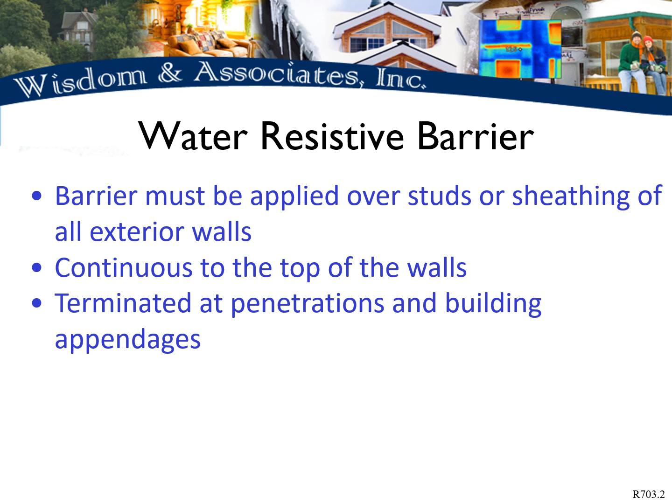Flashings are required around exterior door and window openings and must extend to the exterior wall finish. Interior air sealing around window and door openings is also required. Window manufacturer specifications and guidelines must be followed during this installation, and pan flashing is required for windows.

Our last chapter to cover is Chapter 8, Roof Ceiling Construction.

Rafters that are framed opposite of each other are required to either have ridge straps or a gusset plate installed. Ridge straps aren't new to this edition of the code, but the size and nailing is now clearly spelled out in this edition of the code. A minimum 1 1/4 inch wide strap of at least 20 gauge material is required. The strap must be nailed at least 3 10D nails on each side, with the nail closest to the ridge no closer than 2 3/8 inches from the edge of the rafter.

The language in this edition of the code has also been clarified to permit the use of gusset plates or additional collar ties instead of the ridge strap option. A gusset plate or collar tie must be at least 1x4 material, must be located in the upper third of the attic, and must be located at least every 48 inches on center. The code does call out nailing at 4 10D box or 3 10D common nails at each connection.

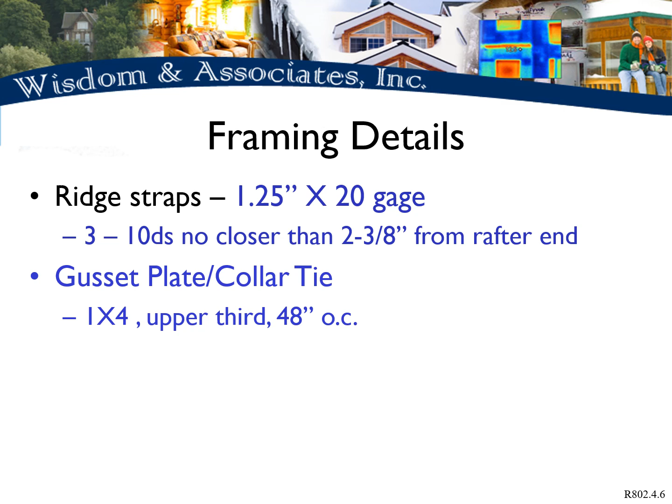Compliant ridge straps are available from manufacturers in 20 gauge and heavier sizes that comply with these code requirements.

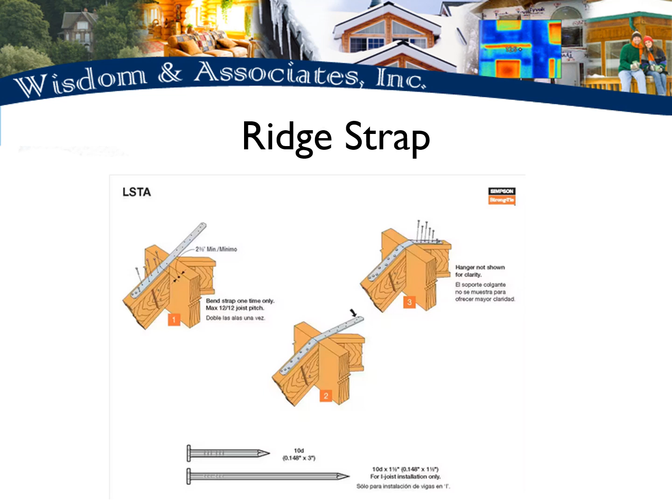That concludes this class. Thank you for taking it, and we hope you learned something valuable along the way.